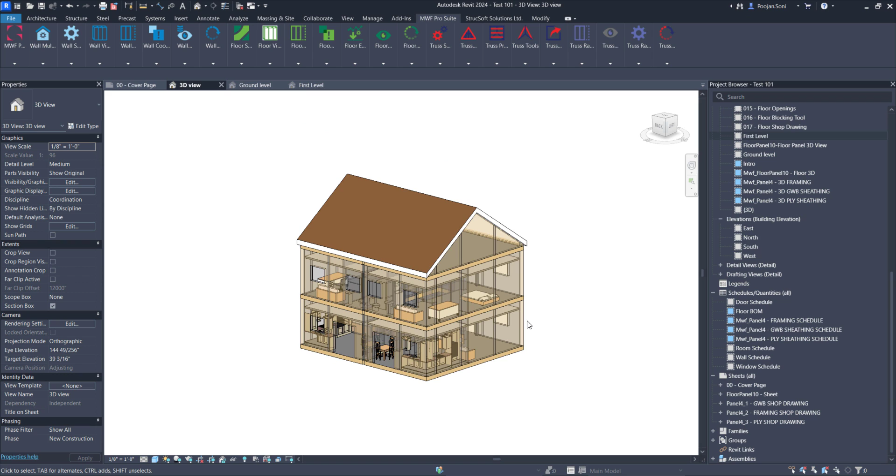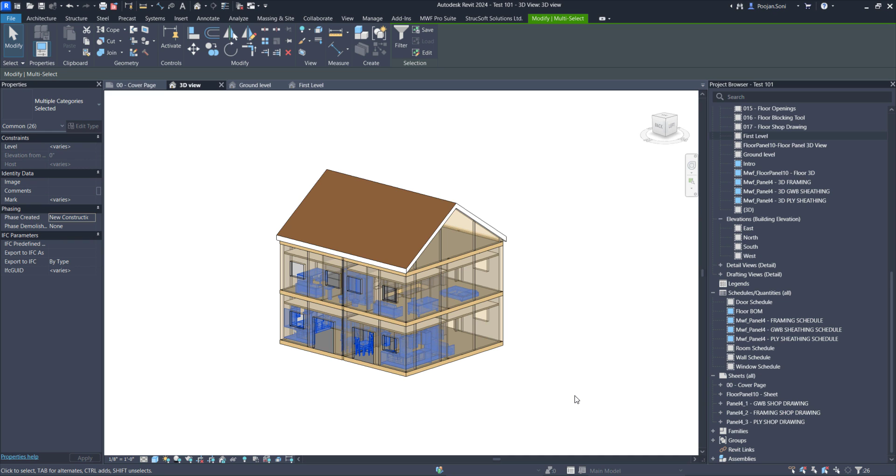I'm going to mask select this, check none. We're going to start with furniture, your plumbing fixtures, might as well do the specialty equipment, and that's pretty much it. We're just going to hide the furniture, fixtures, and plumbing so our project looks much cleaner this way.

Next we need to purge. For that, we're going to go to Manage, and you have this feature called Purge Unused. As the feature says, it removes unused families and types from a project. This is very important before you load any families or use the Load Data feature that comes out of the box with MWF.

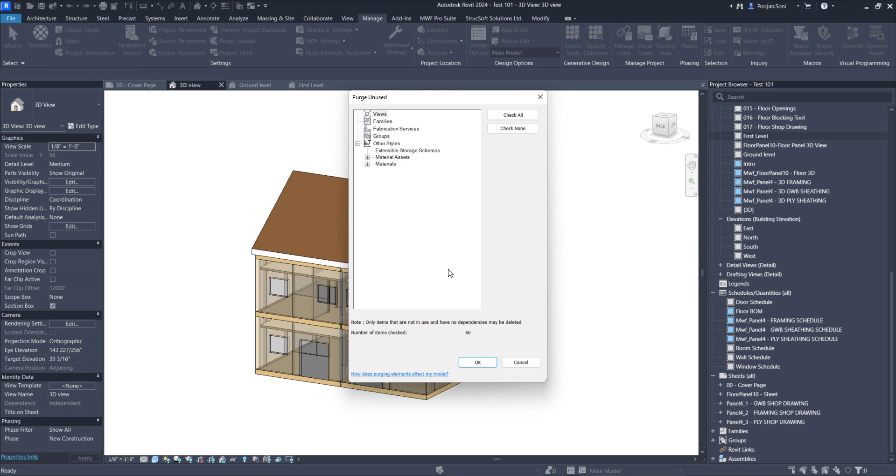We'll click on Purge Unused, and as you can see, it will check almost 1,050 items. We'll click OK, and it will get rid of the unused families from the project, just to make the size of the project a little smaller. I usually run it multiple times, probably twice should be enough. This time it's going to check 60 items, but that should be enough.

Once you do that, you're basically ready to load the families in your project. The best way to do this is where we're going to use MWF a little bit. We'll switch to the Wall module, and under the Settings tab, you'll find this feature called Load Data. It basically loads the preliminary MWF settings to the project. So we're just going to click on Load Data.

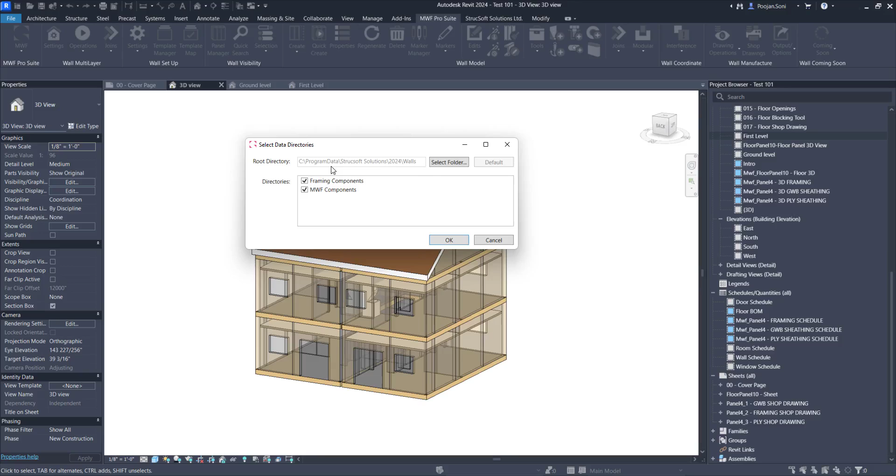It's important that you load both framing and MWF components. If you need to see where this root directory is, all you need to do is click on the MWF tab, and you'll find this feature called Home Directory. Once you click on this—oh, it's on my other window—you should be able to see this path.

Basically, it's your Program Data, followed by StrucSoft Solutions, followed by the Revit year that you use, followed by Walls—if you're working with walls, floors, or trusses, your framing components—Imperial, and then Standard, and then you would find all the families that you need to load.

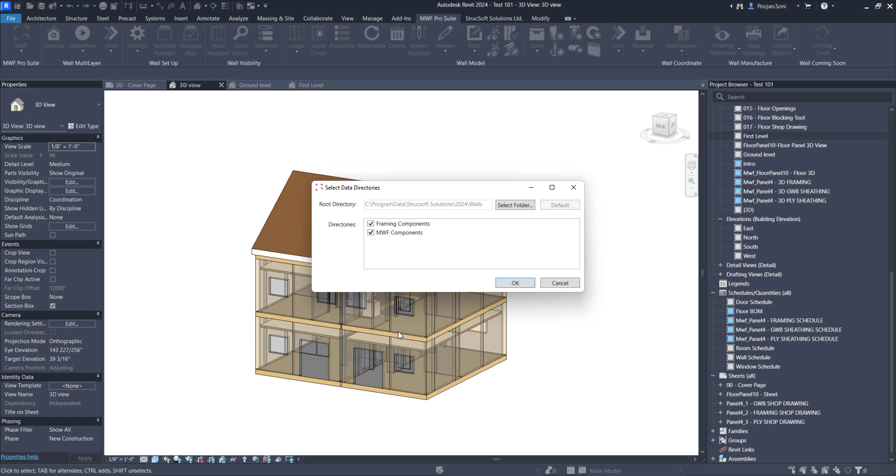I'm just going to close this for now. We're going to go back to Settings, Load Data, and we're going to load both framing and MWF components. Framing components include all the vertical members, horizontal members, and framing members, while MWF components consist of families like nails, anchor bolts, hold-downs, clips, etc. We'll click OK, and it takes just a second to load all of that data, which also includes your markers, joints, and so on.

Okay, so we're done with loading data. Now we just need to load families. The way you can do it is just go through insert and click on load family. Here we just need to follow the same path we just saw: local disk C, program data, StrucSoft Solutions, Revit, walls, framing component, and imperial, and we're going to go standard, and that's it.

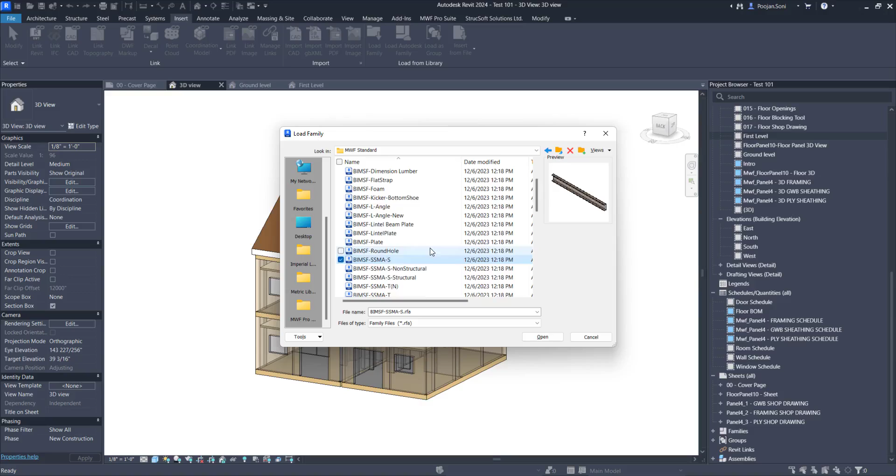Okay, so I'm going to frame this project using basically our dimension lumber family. But again, if you're using LGS, you can just click on the BIMSF SSMA family. We're just going to click on dimension lumber family, open, and this is basically your types. So depending on what members you frame with, I'm just going to select 2x4, 2x6, till 2x12, and click on OK.

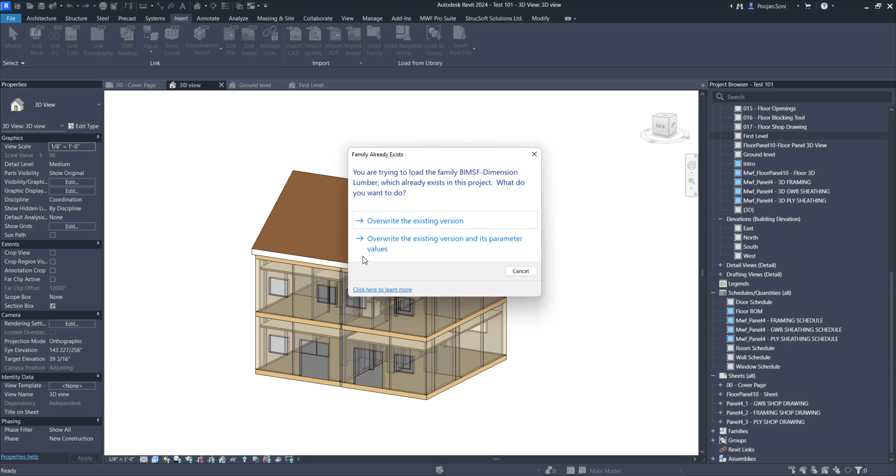And overwrite the existing with the parameter values. And that should be it. So that's basically some steps that you need to do even before you start framing. So far we've successfully purged all unnecessary files and families from this project, and we've imported all the necessary MWF components and framing components to the project.

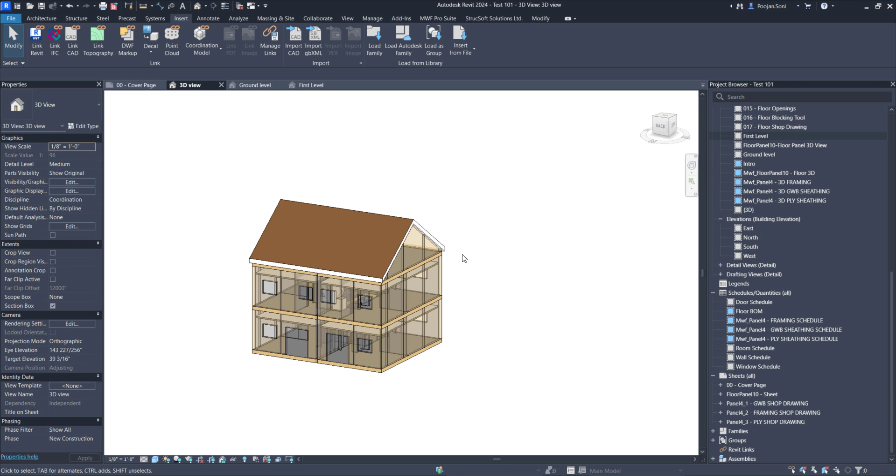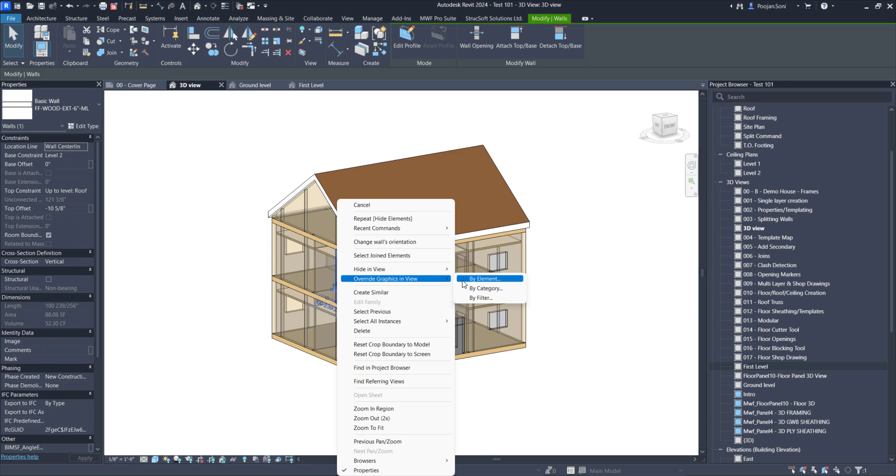Now you can start with assigning different view templates or just creating different 3D views. Basically what I like is to have a different view for each level, and I always make the walls and floors a little transparent. As you can see here, they're already transparent, but if you need to do it, all you need to do is either override the graphics through element, or just open your visibility graphic settings, find walls, and override the transparency to, I like it, 60%, but it's totally up to you.

So you could just override the transparency through here, click OK, and again, as I said, you can create a new template from view template from your current view, or just have something like that I have here created. This is my ground level, and this is basically the first level of this house. Again, if you have your walls transparent, it just helps you see what's going on inside with the framing, and you could see the members a little better.

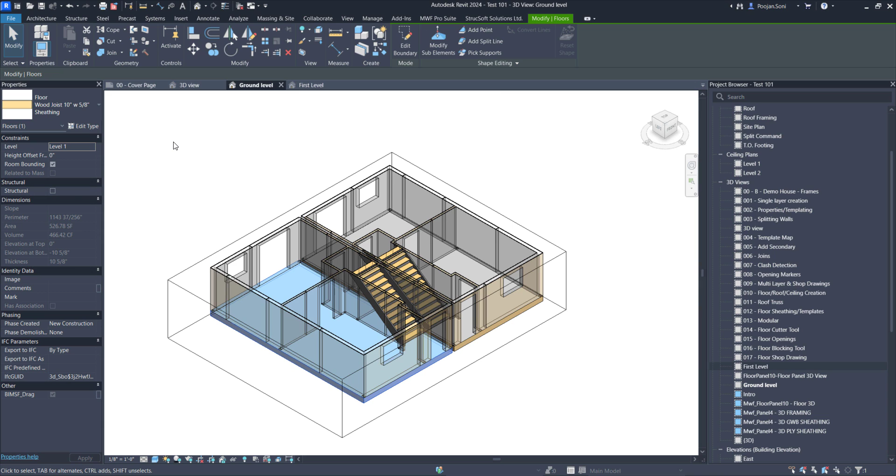Okay, so that is totally up to you how you can do it, and same goes for your floors too. Just override the transparency for your floors, and you can create multiple views for the floor specific as well.

Okay, secondly, we need to also check the wall types. For example, I'm just going to take one wall here. As you can see, I can see my wall type under properties. I'm going to click on edit type, and if I just expand this window a little bit, for the single layer wall, I think it is very important.

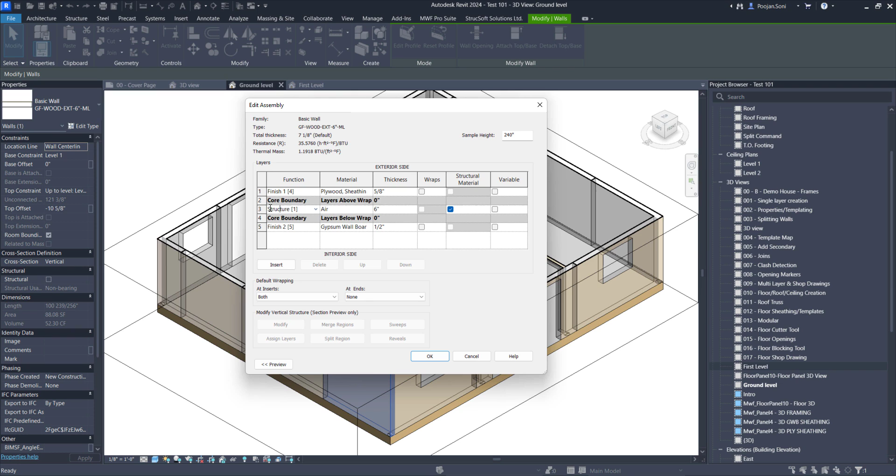Again, this is more like a multi-layer wall, but that your structure layer stays between core boundary. So you want to set up your wall type accordingly, in which basically your structure layer stays in between your core boundary. If you have more than one layer in between your core boundary, MWF might give you an error. So this is again very important to consider when you select the wall type. Other than that, everything seems okay, and yeah, that's pretty much it.

Now, if you need to split walls, as you can see, I have already split the walls here using the split element tool under Revit. But if you don't want to use that, you also have a feature under MWF that I'll quickly show you, in which basically what you can do is just have one single wall profile, and you can create multiple framing panels underneath that same wall profile.

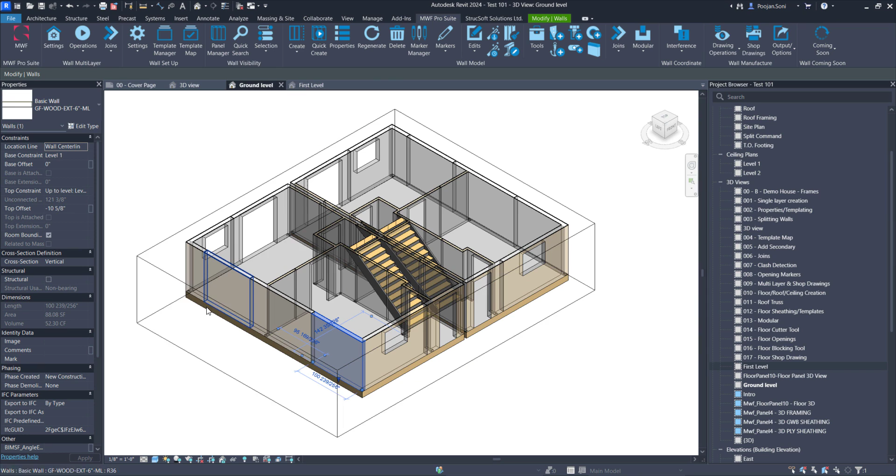Okay, markers, and you should be able to see here. It's called vertical split by wall, vertical split by rule, or vertical split by benchmark. We do have multiple ways of splitting the wall. So when you click on create, you also have the split points menu here. What it does is just basically place split marks.

Let's say if we want to have two wall panels underneath the same profile, all you need to do is click on offset, determine what should be the offset between, or what should be the offset of the split marker. Let's say if it's 2 or 4 feet, you just add it here and click on create, and that will basically split your framed wall panels.

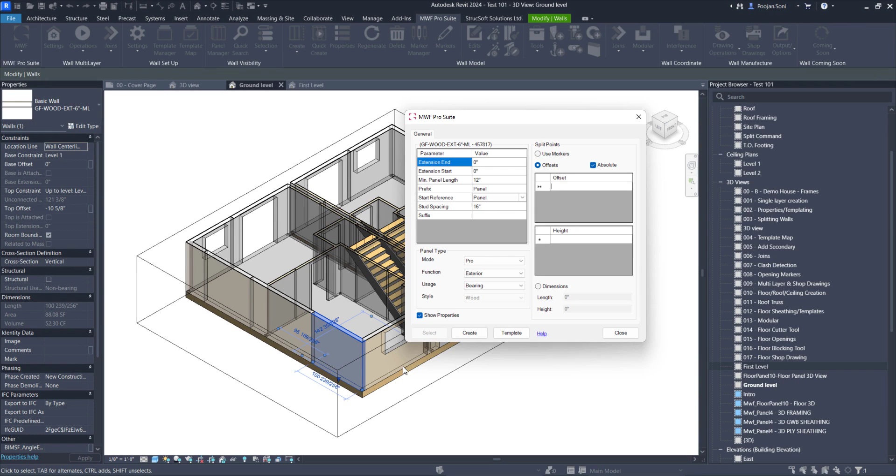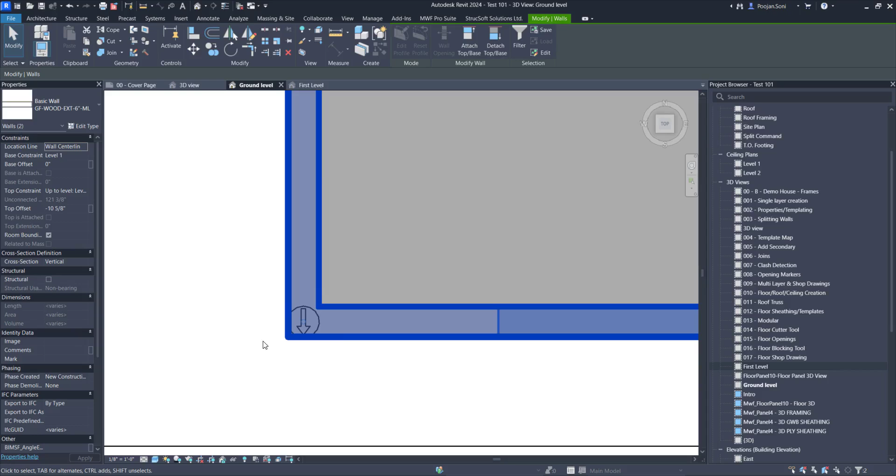Now we're almost done with setting up these walls. A couple more things that I would like to mention. I would also see the way my walls are joined. As you can see here, again, you would be using a join marker to configure your join conditions. So it's very important that you configure your joints according to your preferences.

Alongside with, I would also select my opening basically and just check them. The way you can do it is basically, I would just first go to edit properties. I need to go back for a second.

Back to my current level, I'll click on edit properties and make sure my rough width and rough height are set. If not, that's totally up to you. You can also have some opening marker settings that use this parameter for both rough width and height, so you can come here and change that.

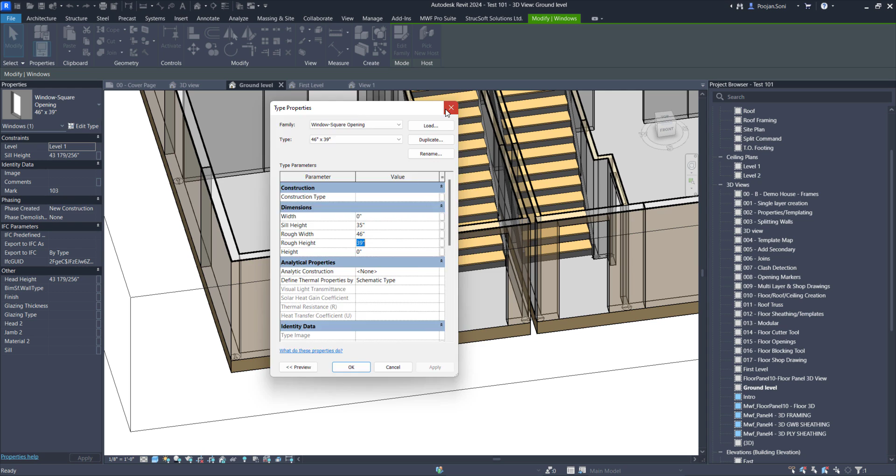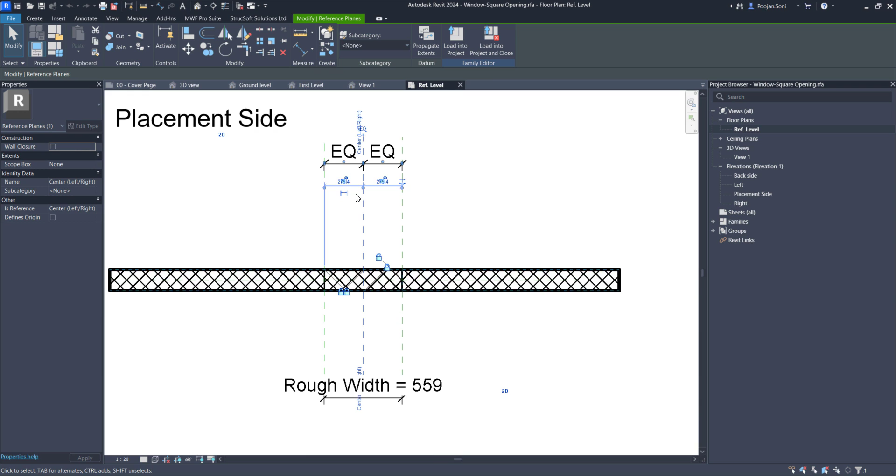Other than that, I would go to edit the opening type and click on the reference level. Here I would see the center line and make sure it's indeed centered with this opening, because MWF will frame around the center line. So it's really important to make sure this is placed in the center. If not, you can manually adjust this and load it back into the project.

I'm just going to close this. And that is pretty much it when it comes to the walls.

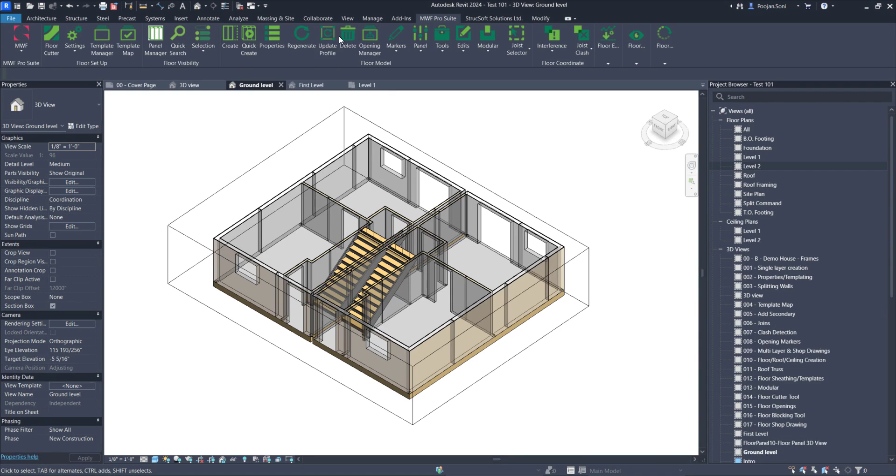Now we can move to floors. As you can see, for level 1 I have my floors here. Again, it's just a sample project so they don't have to look accurate, but the visual solid should be okay.

The way this works is you can have openings in your floors, but if you're using the floor cutter tool, it would consider your opening as a floor as well. So if you have model lines around your openings on floors, MWF will just frame it as is. There's another way to create an opening and manage how you want to frame around it, but that's something you'd find under MWF, under opening manager, where you can frame around it.

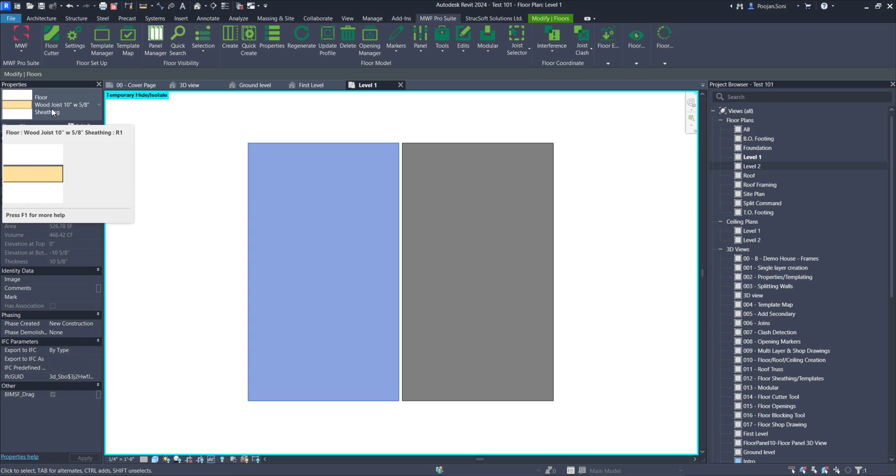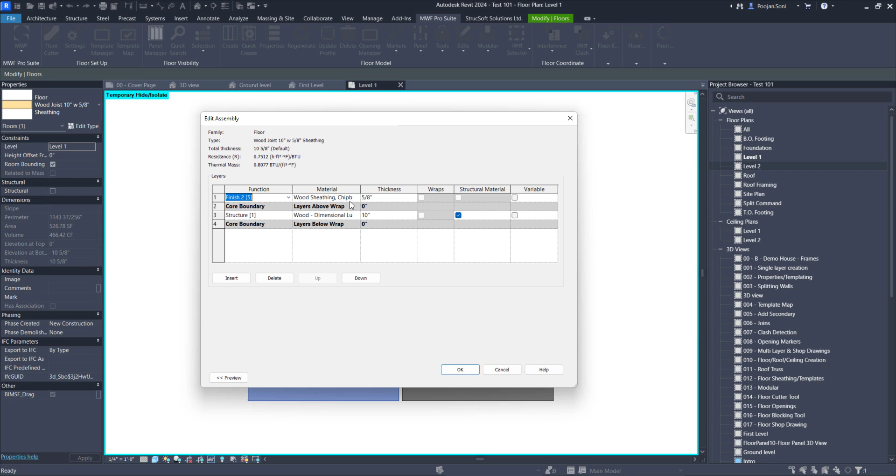A couple things I would check: I can start with the edit type. I would make sure I have appropriate members loaded for the joist that goes with the type of floor I have. I'd edit type and go to edit properties, and here it's very similar to what we've seen with the walls. I would pay attention to my finish layer and what material it's using, especially if you're using the sheathing tool that also comes with MWF. That's pretty much it for this.

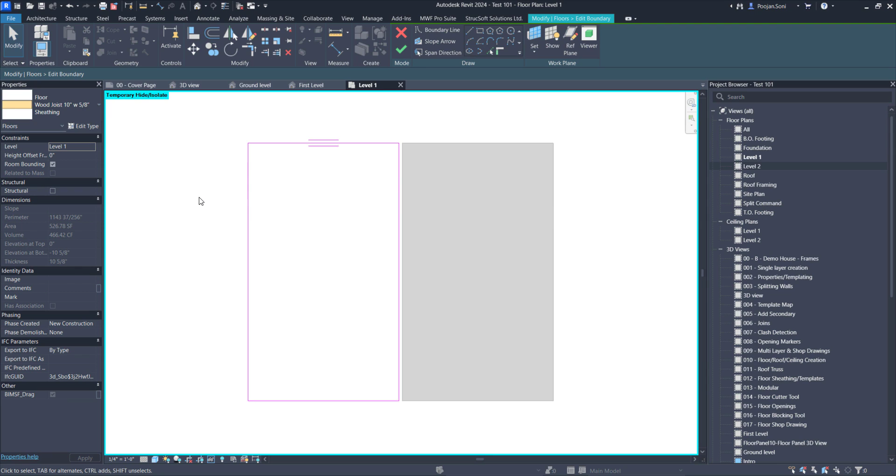I would also click on edit boundary and make sure everything's in a closed loop. I know it's a fairly simple profile for the floor, but depending on the typical floor you use, it's always important to make sure everything's in a closed loop.

Now again, if you need to split the floor panels, all you need to do is have a model line. So that's something I'm going to do here. Let's say if I need to split this floor while keeping the same profile, I just need to split the floor.

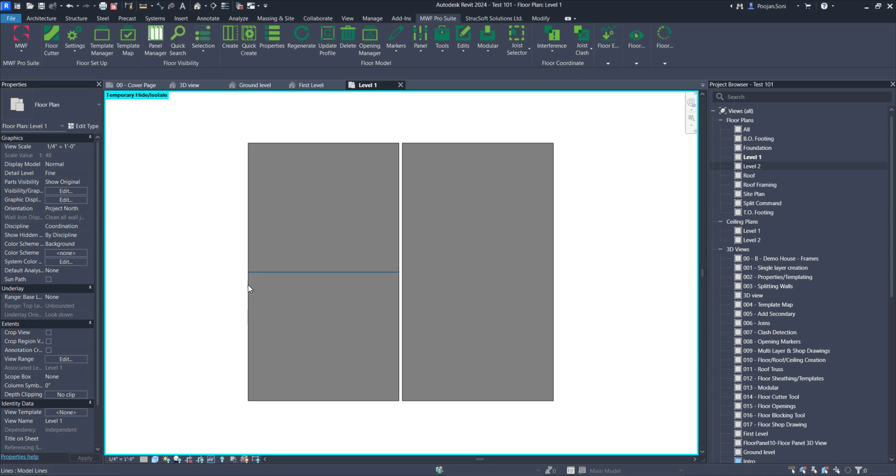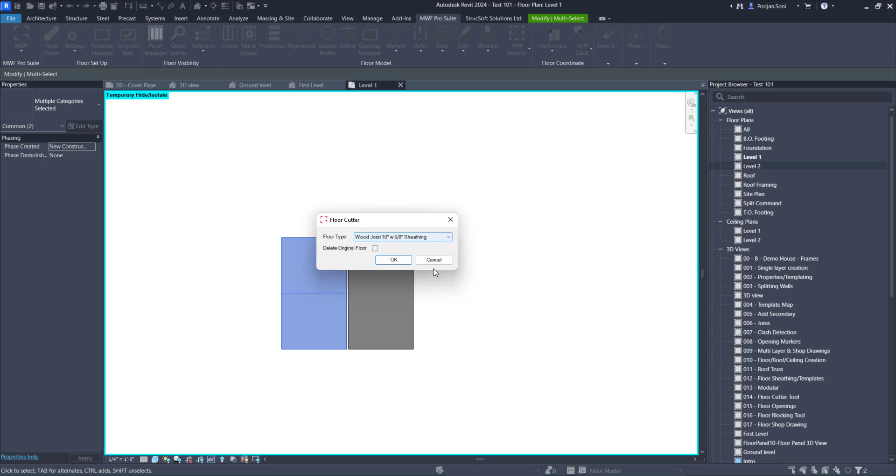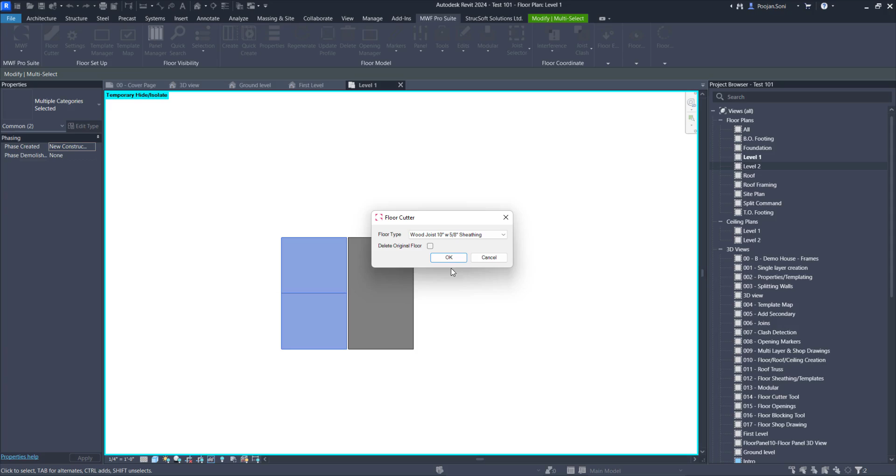All I need to do is select both the floor and the model line, and use this feature called floor cutter. I would see this pop up - you have your floor type, same as you chose, but you also have an option to change it. Alongside this, there's a feature that says delete the original floor. I usually don't check this, but what it does is split your floors into two while keeping the original floor as is. I'm not sure if you need the dimensions of what the floor originally was - it could be useful, but in my practice I usually don't check this, and we'll just click OK.

So as you can see, now our floor is basically split into two.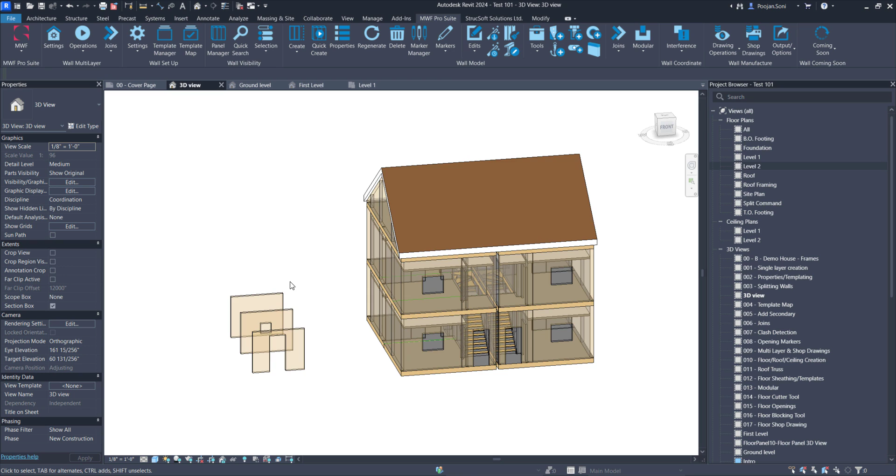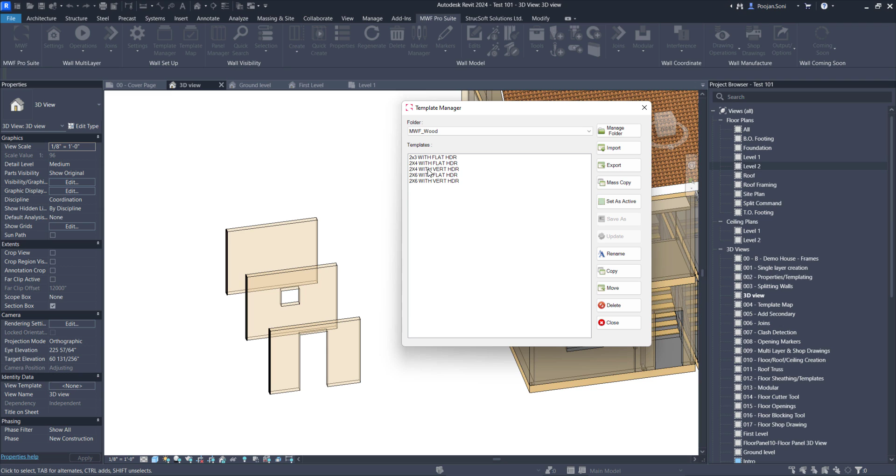I would also like to show you that you can have panels created outside your project with different kinds of openings, and that helps you set up your templates. You can have different templates saved in your template manager. If I go ahead and open this, and go to the wood section, you can see multiple templates such as 2x3, 2x4 with different opening conditions, etc. You can set up everything according to your preferences.

Again, how do you want to frame a door? What opening marker do you want to use for windows, or for walls that have no openings?

You can have as many templates as you want. If you use the same framing condition across your projects, you also have the option to export these templates. You just need to set them up once, and you can use them across different projects. You can always export them and import them into a brand new project and use the same template over and over again.

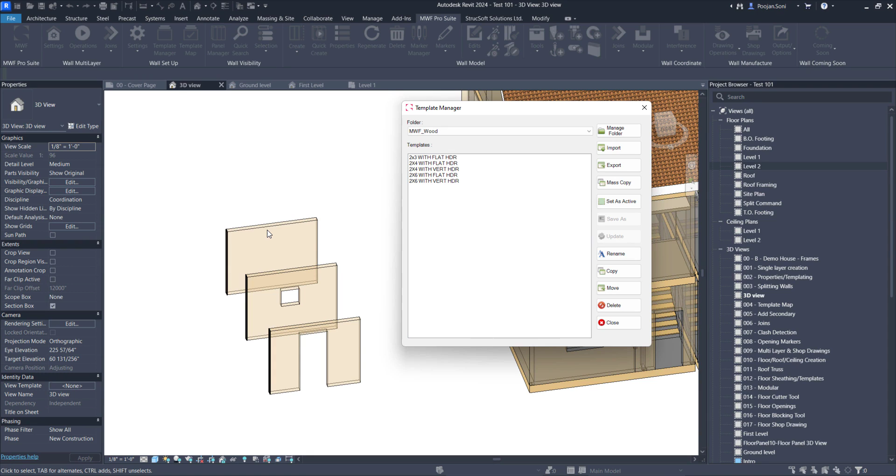You could do the same with floors. You just switch to the floor module, and when you click on template manager, you would see different templates that I've already saved, or the default templates that come out of the box. Again, you can create your own templates and export them to keep using them across different projects.

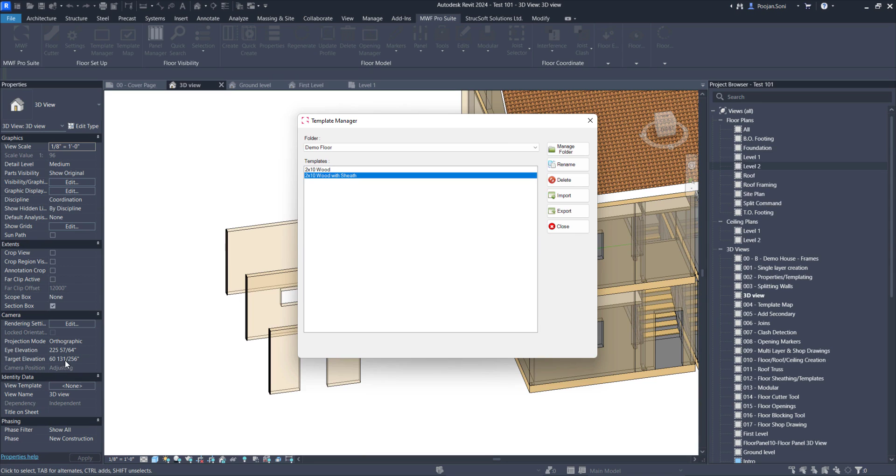Now let's talk about how you can frame both walls and floors and have everything aligned, all the stud members, ideally how you want to align them. For that, we have a new feature under settings called project benchmark. This feature basically aligns your floors and wall studs. The first thing we have to do is place it.

We're going to click on the project benchmark, and this window pops up. Under benchmark type, you see two different types: the default, which is more like a point, and the second one's a rectangular grid. It speaks for itself. When it comes to aligning studs with each other, I think the default goes a little better, so we're going to click on default. Then you have prefix, so we'll just call it BM for benchmark, and initial sequence number, I'll keep it as 1.

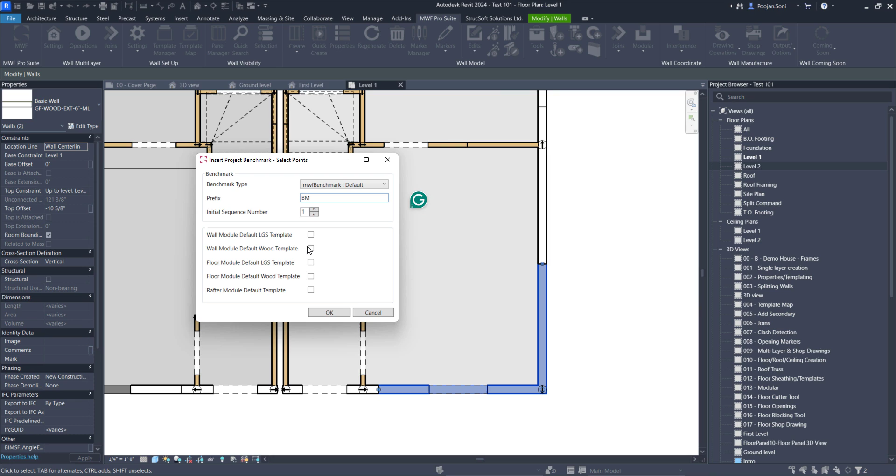Then you basically need to turn on different templates. We're working with wood, so we'll turn on all the wood templates for the wall module, floor module, and rafters. Once you click OK, it will ask you where you want to place this benchmark, so let's just place it somewhere over here.

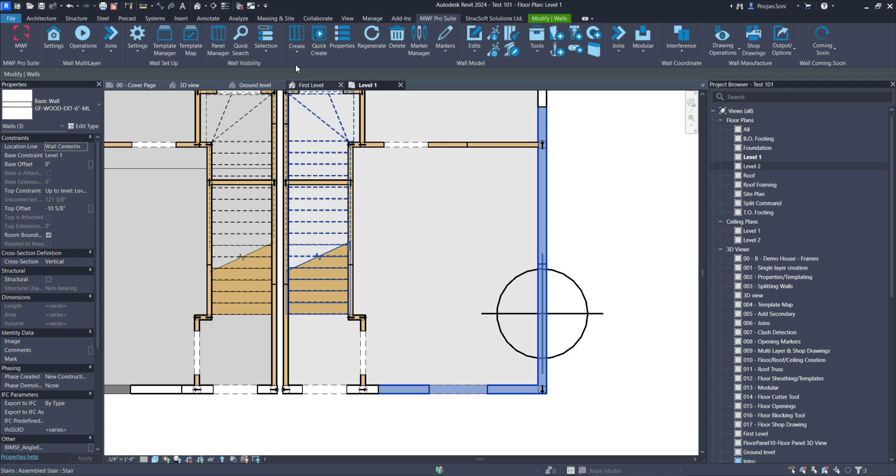Now what we want to do is frame the walls. So we're going to start with selecting walls and click on create. We're going to click on template, and under default template you'll find this template called wood benchmark, which wasn't there before. We're going to set this as active, select close, and create.

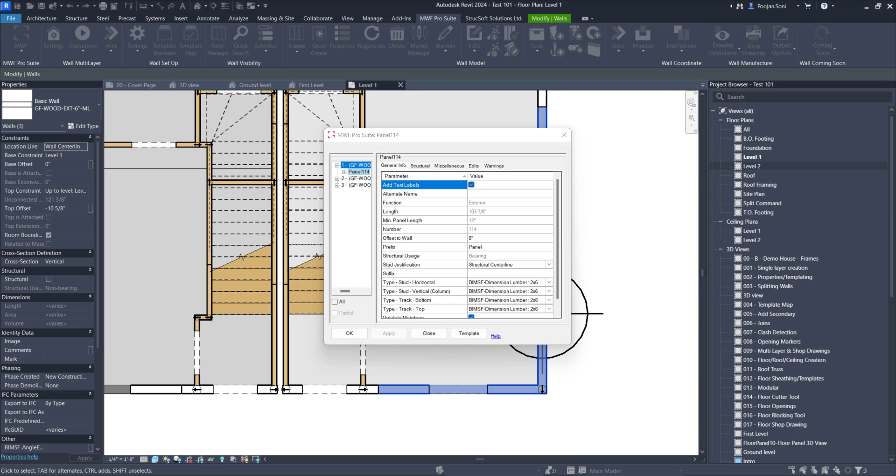Okay, we're going to click on OK. As you can see, my wall member is aligned with this benchmark, and it doesn't matter if I move the benchmark, the studs will shift accordingly.

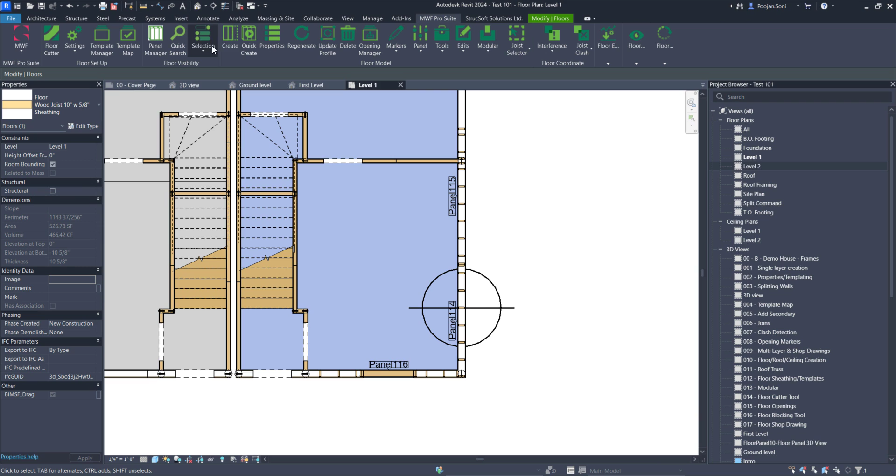The second thing is I need to frame the floor, so I'll do that. Just going to select floor here and click on OK, and we'll switch to floor module and click on create. Here again you'll find the same template called wood benchmark, and we're going to click frame it now and click create. Okay, our floor is ready.

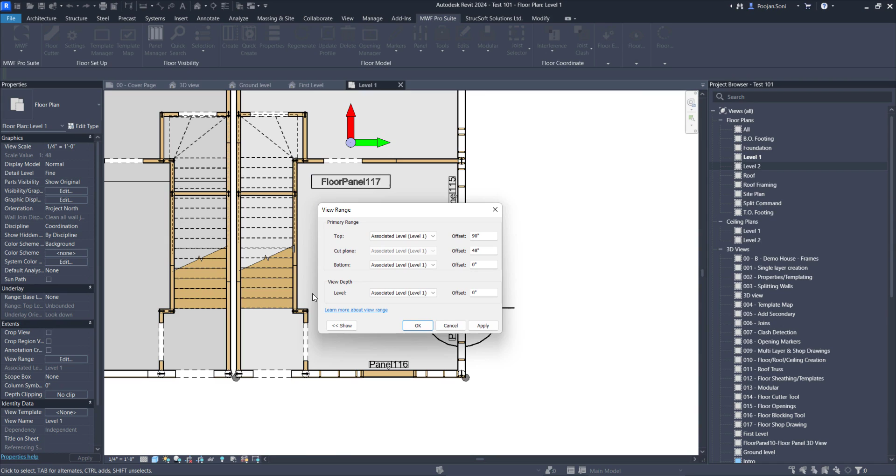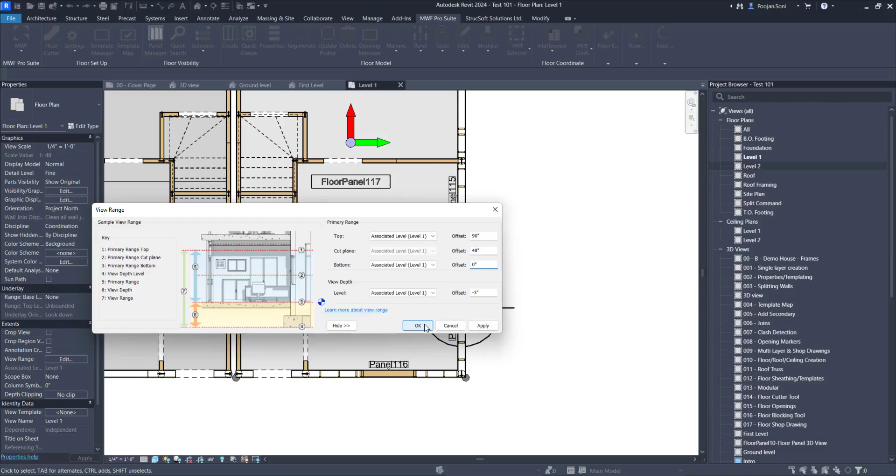Sometimes if you don't see the members, that's because your view range isn't set up. So we're going to click edit. You can extend the preview to get a better idea of what we're doing, but basically your view depth is set to 0, which is your number 4. All you need to do is put a negative value. I'm going to put negative 3 feet, negative 3 inches, and that's pretty much it.

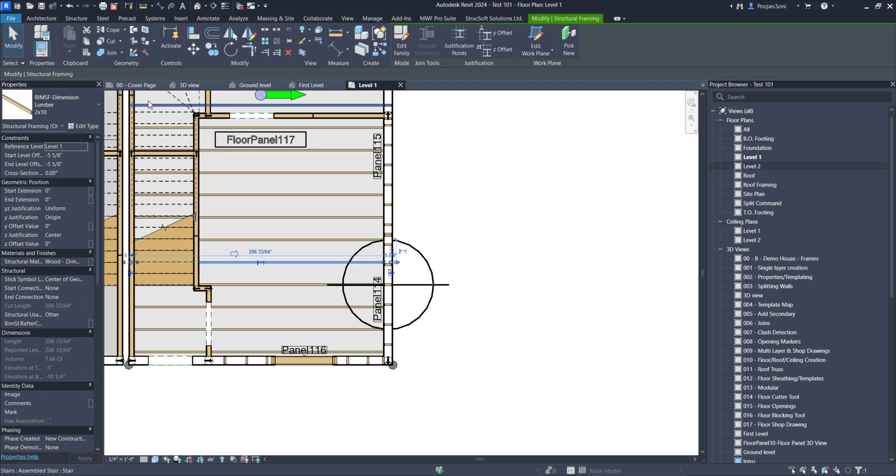As you can see, your members are now aligned with the benchmark. I think the only reason the rest aren't aligned is because the spacing between your floor members isn't the same as the spacing between your studs. You can simply go ahead and change it through MWF. That's not a big deal, but this is basically the purpose of the project benchmark, just to help you align your members with each other.

And that basically wraps up our webinar on how you can set up your Revit model. We did go through some very simple and basic strategies on how you can set up your Revit model before you start framing using MWF.